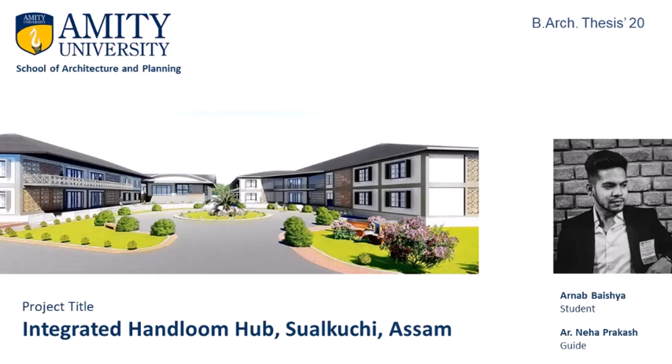Sualkuchi is a beautiful scenic area situated on the northern banks of the magnificent Brahmaputra River, around 35 kilometers from Guwahati, towards the west. A development block of Kamrup district, with 8 gram panchayats, the total area of Sualkuchi is estimated to be 9.37 square kilometers. It is a weaver-centric region, also known as the Manchester of Assam.

The population of Sualkuchi development block is 70,962, and the total number of weavers is 19,530, with 16,975 handlooms. The Sualkuchi Handloom cluster covers 340 weavers working devotedly towards their progress.

The Ahom reign brought vast progress in the handloom sector of Sualkuchi. Sualkuchi is home to the golden Muga silk of Assam.

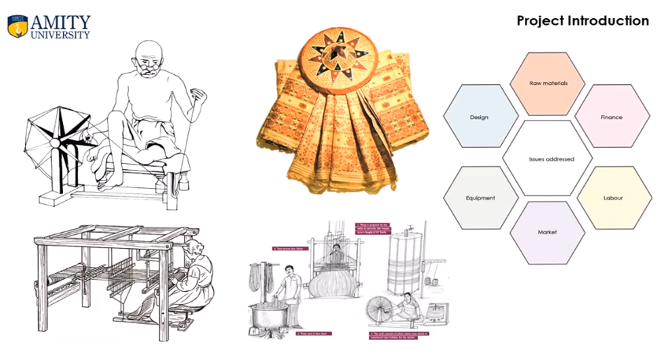The main reason behind choosing this project is to address the issues faced by the local handloom weavers, affecting production and overall face of the industry. The issues are lack of availability of raw materials at standardized rates, lack of a well-defined market platform, adulteration of Assam silk, and lack of proper infrastructure for small-scale weavers.

The objectives of the project are to study the handloom weaving village and identify the issues that can be addressed through the scope of architecture, to formulate a project brief with solutions for the identified issues, and to design a hub which stays within the spirit of the local community and uplifts the face of the industry.

The idea is to stitch the activities related to handloom weaving under a single hub.

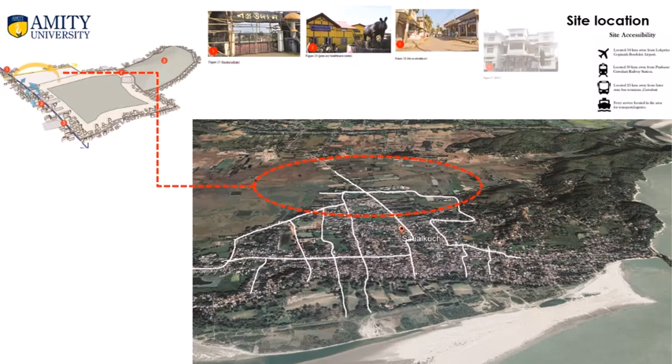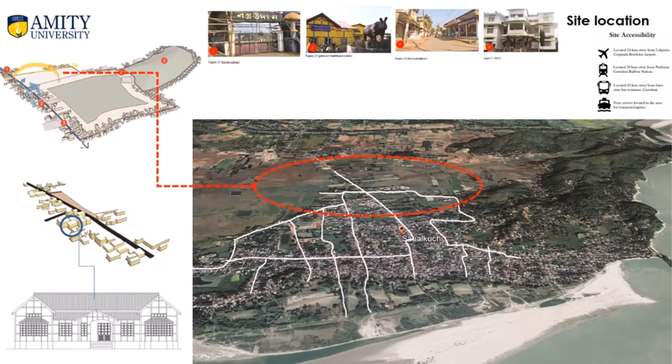The site is located in Kamrup Rural, 35 kilometers away from Guwahati. It is well connected by various modes of transit and is located at the entry of the village. The site is abutted by the main Sualkuchi road of 9 meters and a secondary 5 meters road. It is flanked by the weavers' settlements and the retail bazaars, which are low-rise structures.

The major functions of the project are administrative, research and training, retail, bazaar, restaurant, auditorium and guest facilities. The zoning is done based on this hierarchy.

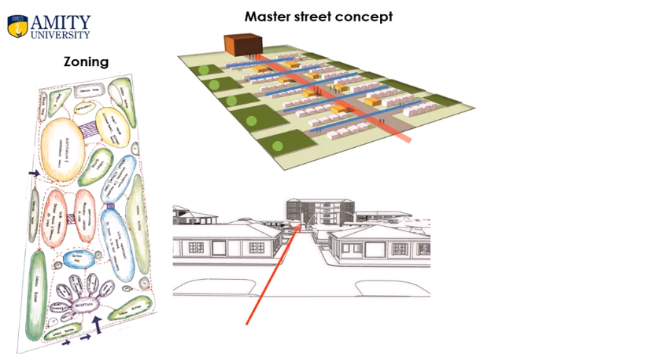The concept of the project is developed keeping in mind the nature of a village. The 3 main underlying abstracts are the warps and wefts of a textile forming the grid of the site, the master street manifested in a vertical spatial experience, and the chowk being the hub of activity in a village.

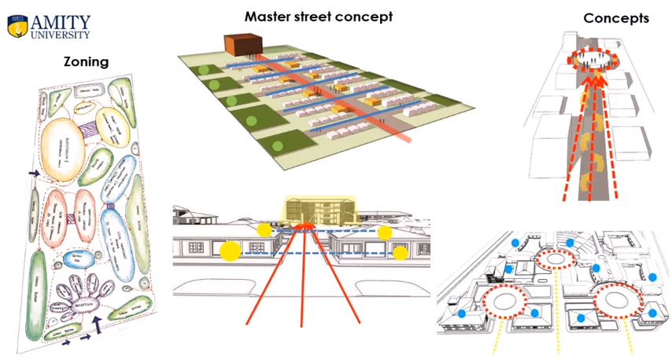The layout of the site is done in such a way that the major functions are supported by minor informal activities which further spill out into the open spaces.

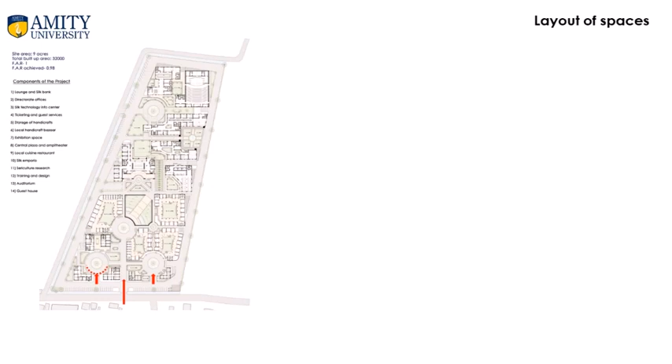There are 2 entries into the site, namely from the 9 meters road entering into the administrative block and the bazaar chowk, and the 5 meters road entering into the institute, guest house and auditorium. The chowks form the bridge of activities where there is a substantial variation in function at every juncture.

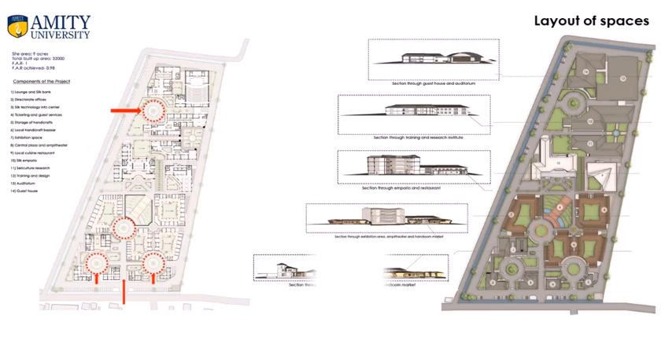The site is majorly pedestrianized with walking portals and sit-outs. Use of bamboo is extensive along with fly ash bricks for construction. The Silk Emporium is the highest structure, going up to 4 floors.

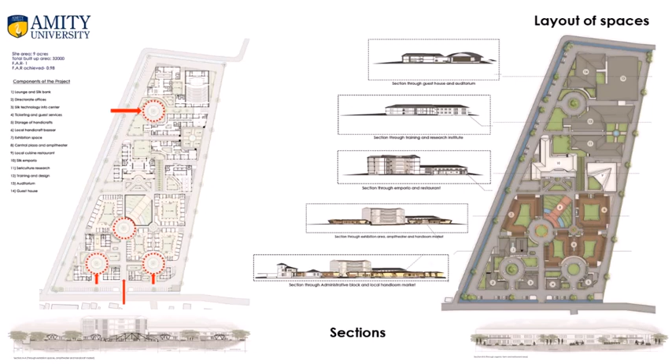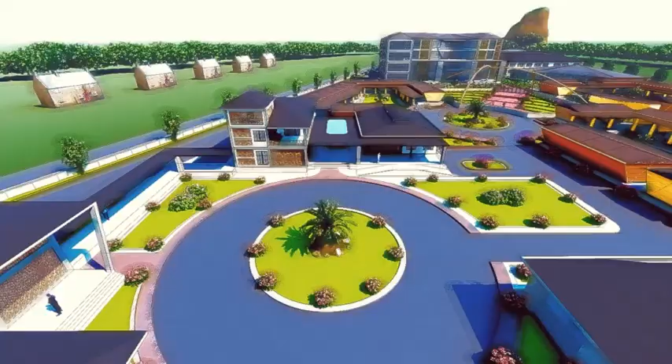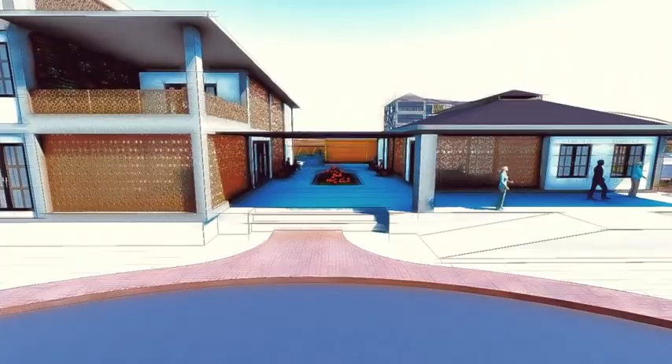On entering the site, we see the administrative block. On the left flank, the administrative block consists of a VIP lounge, a silk yarn bank, a silk technology information center and the directorate offices.

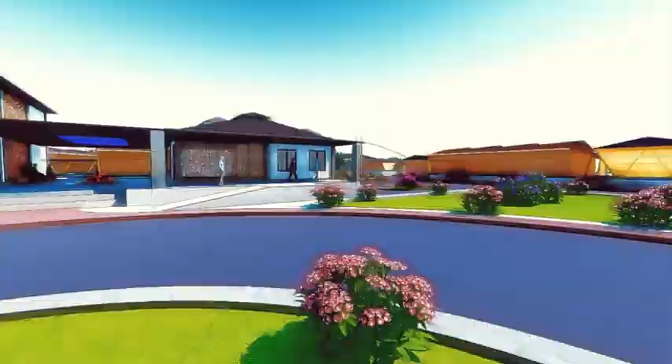Moving on to the right flank, we see the bazaar chowk. The ticketing counter and the temporary stocking facility is present here. There is seating along the chowk.

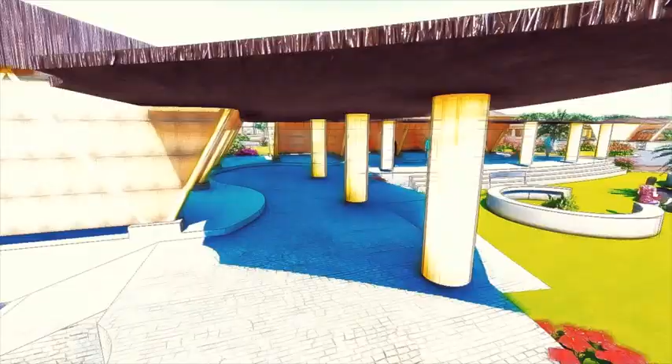The local handicraft bazaar cottages are cordoned off by the arcade, which further spill out into open landscaped breakout spaces.

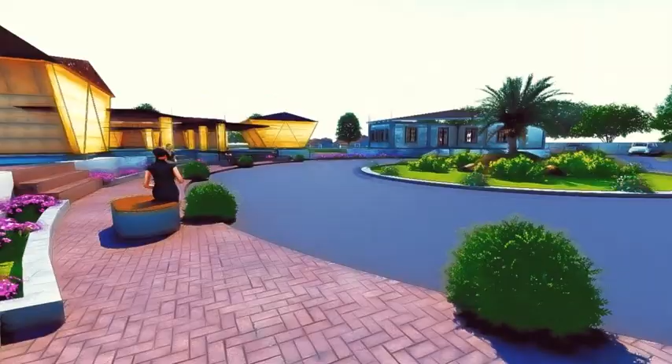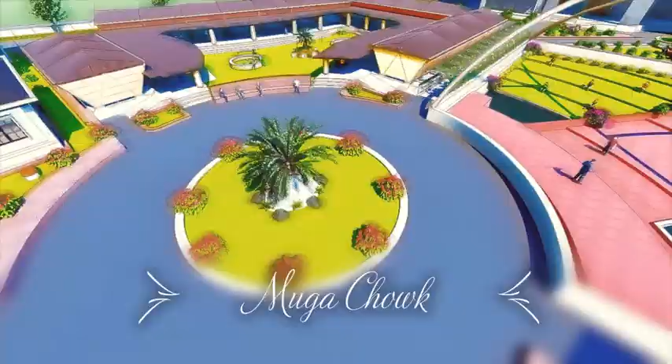The central chowk looks onto the exhibition cottages, the amphitheatre, the local handicraft bazaar, and the silk emporium.

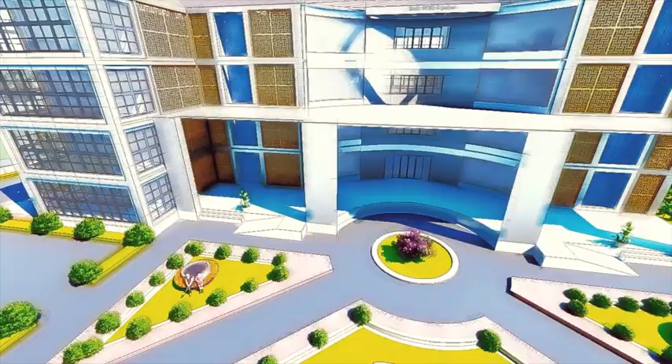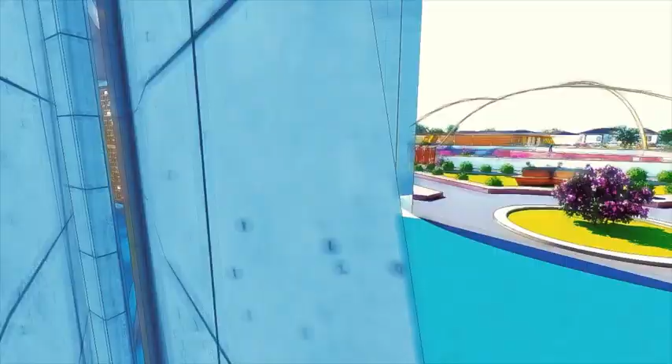The Silk Emporium aims at branding of Assam silk. It has about 50 shops. A local cuisine restaurant with an organic garden serves as a recreating and dining space.

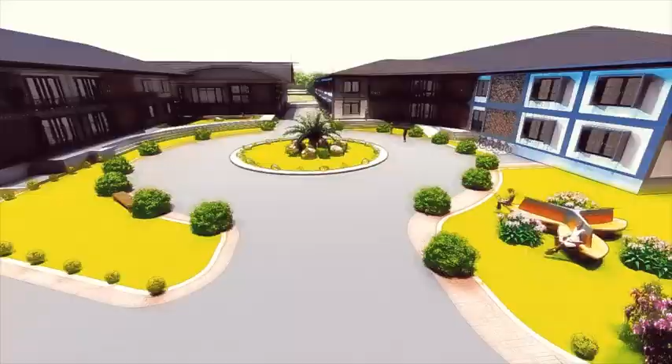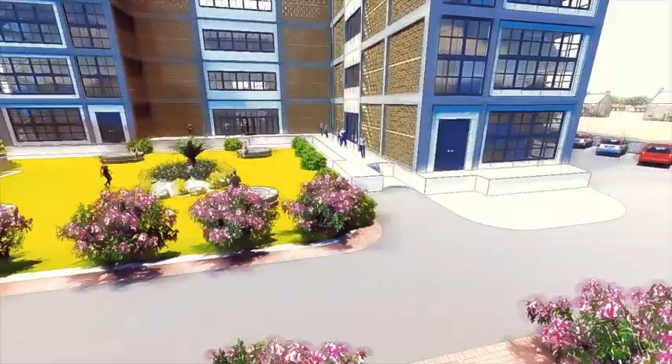Entering from the 5-meter secondary road, there is a Handloom Design and Sericulture Research Institute with an open plaza with seating, serving as a breakout space.

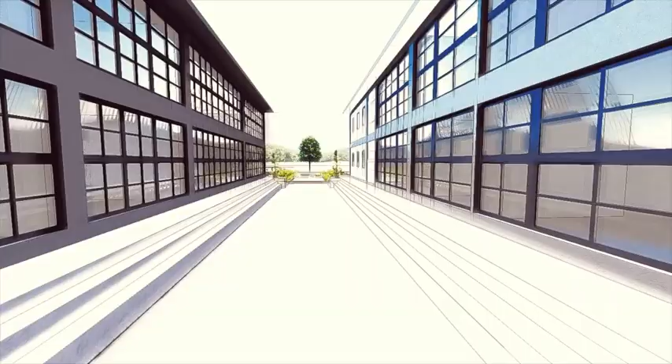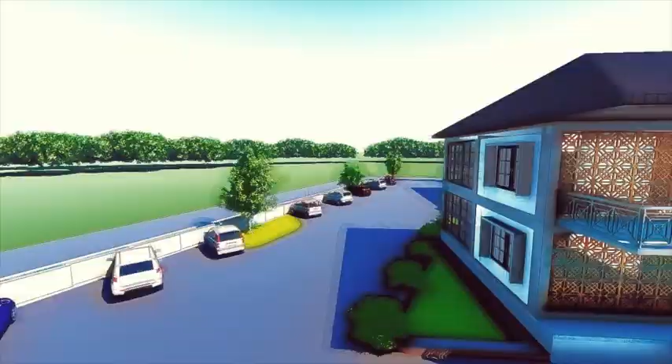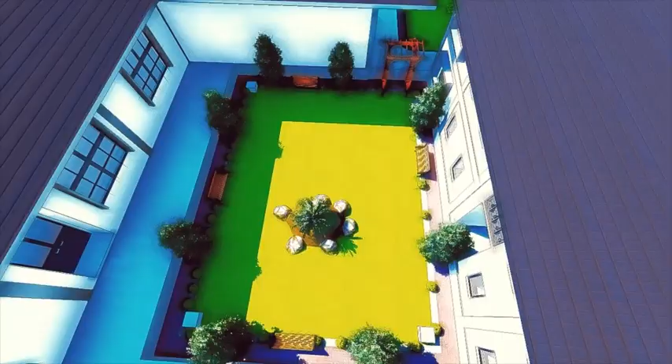There is a guest house with rooms for research scholars and families. There is a 500-seater auditorium, envisaging a new horizon in the handloom industry of Sualkuchi, a new tomorrow.